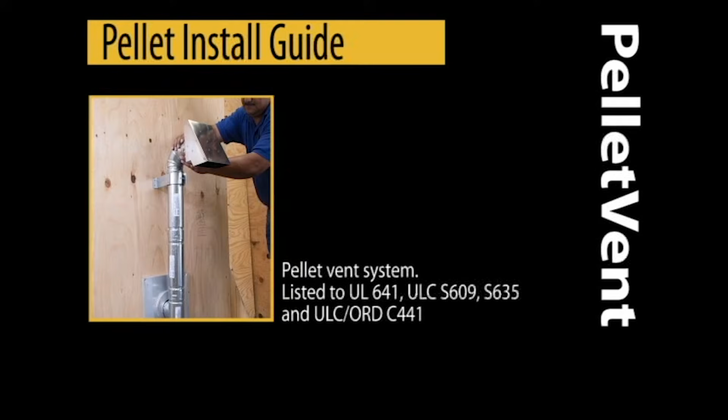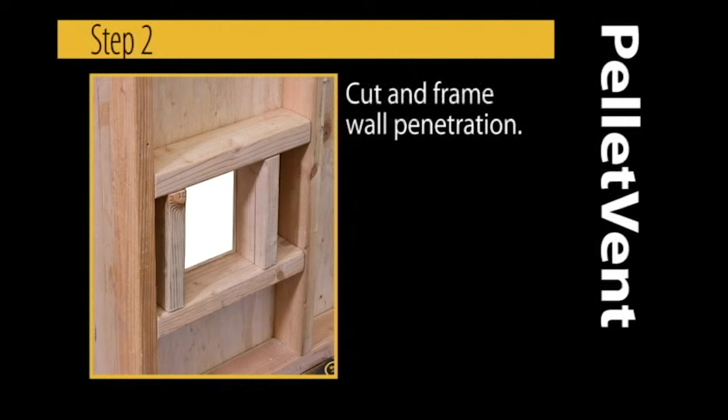Locate appliance and penetration through wall. Cut and frame wall penetration. Apply high-temperature silicone sealant to the appliance outlet.

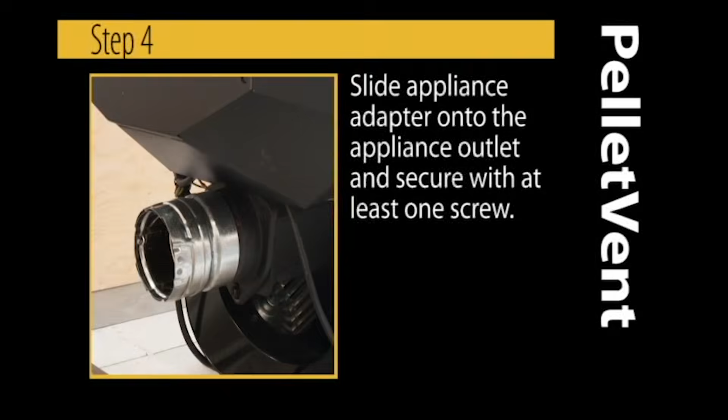Slide appliance adapter onto the appliance outlet and secure with at least one screw. Slide the outside portion of the wall thimble into the framing. Level and attach to the wall.

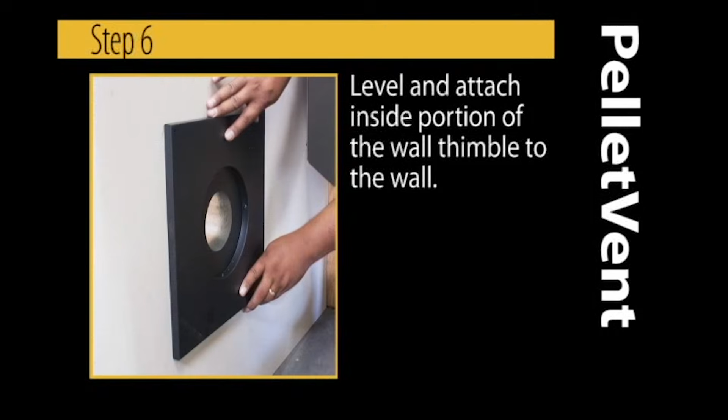Level and attach inside portion of the wall thimble to the wall. Slide the pipe through the wall thimble and attach to the appliance adapter on the stove collar.

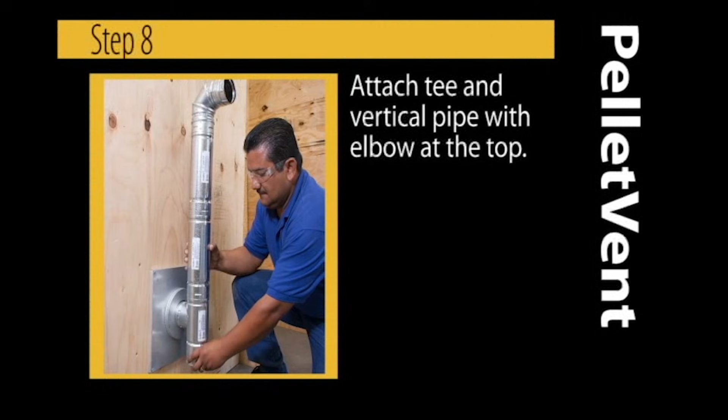Attach the tee and vertical pipe with the elbow at the top. Make sure the pipe is plumb and secure pipe to the wall with a wall strap. Attach the horizontal cap to the top of the elbow.